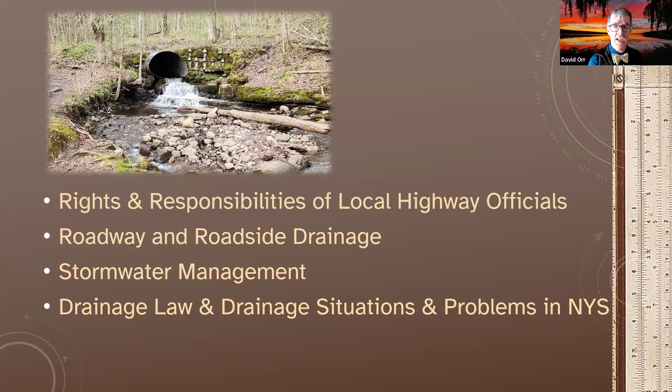There's rights and responsibilities of local highway officials, roadway and roadside drainage, and stormwater management. Those are all workshops. And then we also have a drainage law on drainage situations and problems in New York State, which was written by Darryl Harp, who used to be the chief counsel for New York State DOT. And a lot of what we're talking about today comes from that particular workbook that's up on our website.

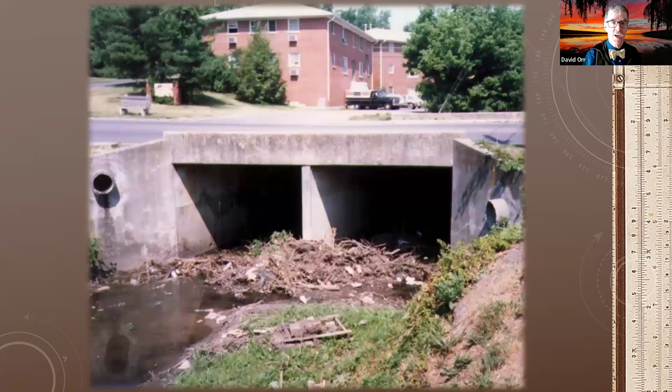You know, if you see an old bridge like this one, big double box culvert, which DEC would prefer you not to have. We'll talk about that a little bit. But when you get this debris, who's going to clean it up? What do you do about the debris coming down? Whose responsibility is that? These are all things that come into a legal aspect, and of course, liability, as y'all put onto the word cloud that we've got.

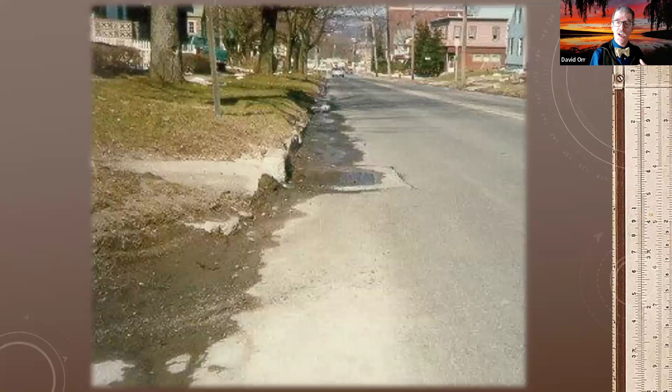In an urban area where you've got stormwaters and storm sewers, you've got to worry about your system and what happens when it first flushes. What happens during a storm event? What happens if it gets plugged up by somebody else's debris? In this case, it was from a construction site on the left, actually plugged up the catch basin somewhere, actually the pipe between 2 catch basins. So how do you clean that out properly? And you're going to have to deal with the storm sewer system, and that can be an issue to deal with.

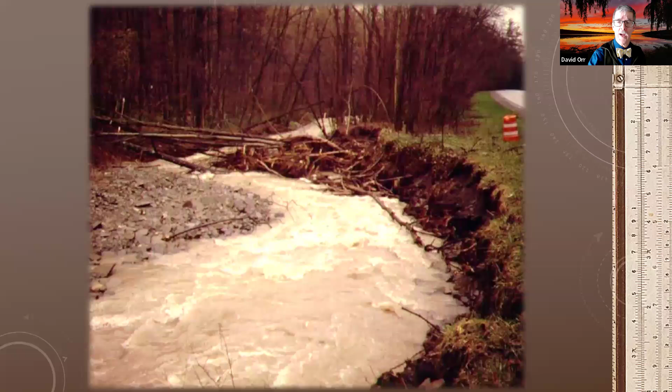Then we can get issues where we have a stream that gets out of its banks and it starts to threaten the roadway. And what can we do legally here, and what do we have to do in the way of both permitting and to make sure the problem doesn't come back? And I'll give you a hint, by the way. Don't just go in there and straighten the stream out. That would actually be one of the worst things you can do, would actually make the problem worse.

When we have a farm field or just any field or land where it intersects with the highway, how do we bring water from the private onto the public right-of-way? And if we can do that in a coordinated way, we're all going to be better off, but we know that doesn't always happen. If we create our own problems, we have to deal with our own consequences. If we don't take care of erosion, if we don't take care of where the water is flowing, we may be responsible. And these are all drainage law issues that we're going to have to deal with.

So that's our goal today. We're going to be talking about all of these things and hopefully give you some insight so you handle water in a better way. And I have good news for you, however, that it turns out that there's actually a pretty cool rule that we can use that saves us most of the time.

So now, first poll that's a question, not just a welcome, that is, New York State drainage law is derived from which of the following? Common law, civil law, reasonable use, or none of the above? Okay, not what it is today, but where does it come from? Okay, so in the United States, we have two choices for drainage law. Okay, you can keep answering while I go on,

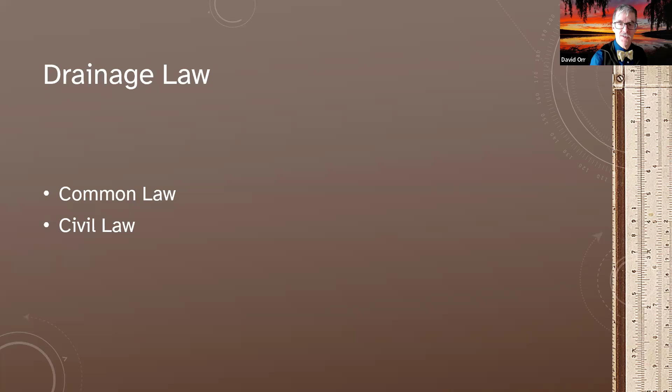So when the Grand Teton Dam failed in Idaho, which was a common law state, they could say, well, we just decided we didn't want that dam anymore, and we're just discharging it. Now, obviously, that's not reasonable. Nobody would expect that that's a reasonable activity, and the courts would have definitely ruled against that. New York State, by the way, is a common law state. Our laws came from the common law. Okay. Now, there is another law in the United States called civil law.

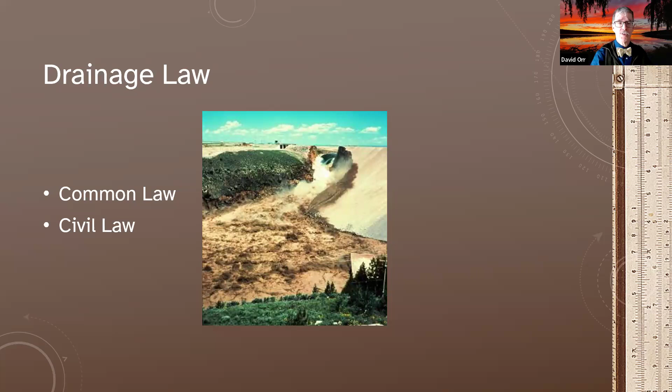That means you're supposed to be civil to your neighbors. You're never supposed to change anything because that's not being neighborly. And so therefore, theoretically, after Hurricane Katrina in Louisiana, which is a civil law state, Louisiana and Maine, the ones with French connections, they could have done nothing. And that's not reasonable either.

And in every single state, the law now has gone towards reasonable use. Between court cases and judge decisions and attorney generals and comptrollers, the idea is reasonable use. You can probably do it if you're reasonable about it. And that works 95% of the time. I'd love to say 100, but remember, there's conflicts and there's still court cases that are involved.

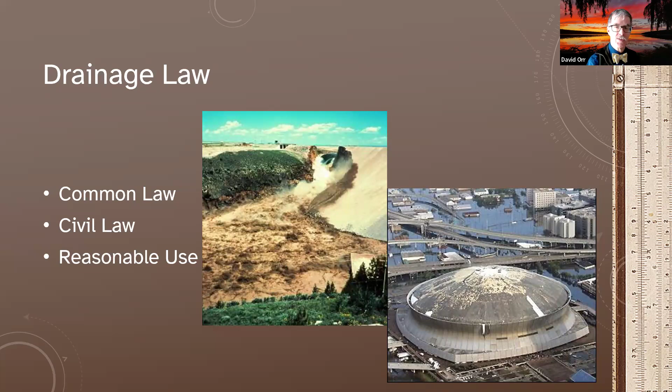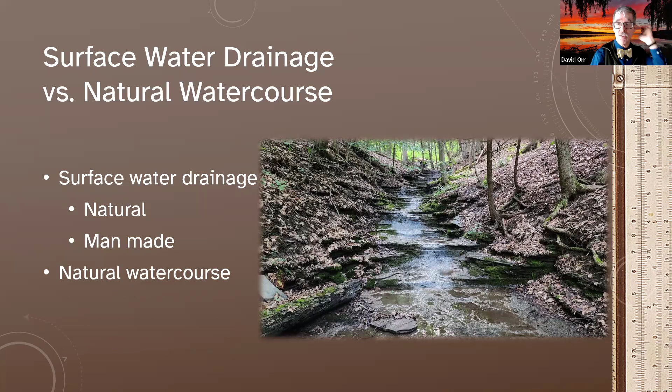If it's man-made, you have to control and take care of that water until it gets back to a natural water course and isn't creating any problems for that natural water course, okay? Now, what is man-made? Well, that's where the court cases come into play, and we'll talk a little bit about that, but just realize that if it's natural, you can probably do almost anything because it's considered part of nature, okay?

Now, if you're in an urban area, it's usually pretty easy. You've got storm sewers, you've got lots of impervious surface, you've concentrated and increased the peak flow. Almost assuredly, that's going to be considered man-made waters, whether it's from the surface or even in the natural water course. It's no longer a natural water course at that particular point. So in that case, any water in a storm sewer system, you have to essentially control it until it is dissipated back into a natural environment. That means you don't want to have erosion, you don't want to have extra pollutants. There's all kinds of things you have to worry about there.

So one of the questions that comes up then is putting a culvert in. Is that a natural water course or is that a man-made water course? So I'm going to ask you to raise your hands, okay? And I've got your question, Paul, I'll come back to it in a minute. But raise your hand if you think that stream is man-made flow. Let's see how many people raise their hand. Okay. A lot of you think that's man-made flow. Now, I'm assuming the rest of you think it's not man-made, but let's just confirm this.

Watch this trick. Hands are up. All the hands are going to get lowered magically. Watch this. Jody and Amanda in the background, magically lower your hands.

Now, everybody who thinks that's a natural water flow, raise your hand. A lot more of you. Yeah, and actually, a lot of you didn't vote. And guess what? Every one of you has some good arguments to be made, and we'll talk about that. But most of the time, if a culvert's been there for a long period of time, it's considered a natural water course. If you don't have records of when it was installed, and it's been there as long as anybody can remember, the courts have generally said, yep, that's a natural water course.

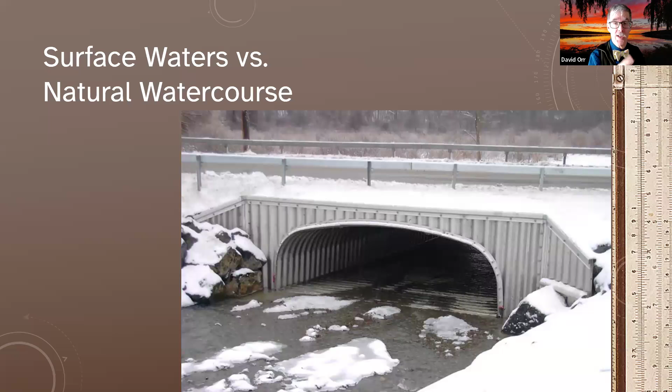I want to leave that question active. It's a good one, and we will come to it, I promise. But let's talk first about replacing the culvert, okay? So we got a culvert washed out during a big rain event, hurricane actually. I can't remember if it's Irene or Lee.

Pipe is actually big enough to handle the design storm. Could the municipality reset that pipe without a permit? True or false? Can you answer the question? Could the municipality reset the pipe without a permit? True or false? By the way, I'm only giving you two choices. I should give you a third.

So about 3/4 of you are saying true, about 1/4 of you are saying false. What I should have given you is a third choice, of course, which is depends. Okay. Depending on the stream, you probably can replace it, but certain streams you'll probably have to get a permit.

If you declare it to be an emergency situation, and yeah, I think that's an emergency situation, you could still replace it without the permit, but you still need to think about the same requirements as if you were getting a permit, okay? So in terms of bank full, in terms of discharge, in terms of things that you're going to be doing, okay?

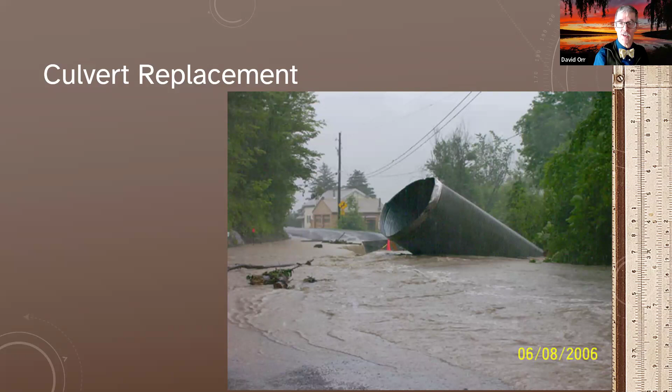So yes, most of the time you probably could, but again, are you being reasonable about the replacement? Are you making sure you're not creating an erosion problem downstream? Are you dealing with any changes in flow that have occurred since the pipe was put in the first place? So these are things that you need to be asking yourself.

Now, I don't know if you've seen this yet or not. It is available on the DEC website. You may want to review this. It is not yet an official set of guidance, but I will tell you, this is out there. Public comment period is already over. We'll see what actually gets promulgated. But they have some draft guidance for the review of bridge and culvert projects where there's a DEC permit needed.

And first off, they're preferring bridges and open bottom box structures, a natural bottom, either an arch or a bridge. Four-sided boxes are okay, but they'd like to have it embedded, where you've got fill above the top of the bottom, unlike we saw in that aluminum box. Elliptical or squashed, and then round is actually the least preferred of all of those.

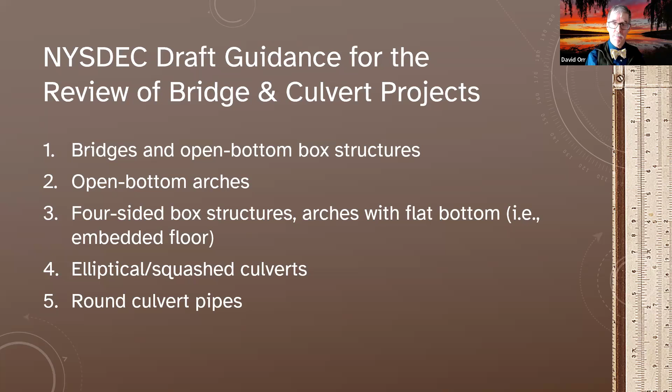And the reason for that is that they want to make sure there's connectivity. Aquatic animals can get through, lizards can get through, even just mammals can get through, and it's harder and harder for them to do that the more man-made the bottom is, the more like a round pipe. The other one that is going to come up, and a lot of you may have heard about, comes back to the size of the pipe.

So do you know the design storm you use for your crossroad culverts? Can you tell me that? Okay. So let's see what y'all have for your design storm.

And somebody asked a good question about increasing the size of a culvert during an emergency. Absolutely. You probably should be thinking about making it larger to handle the design storm that it needs to handle. If it can already handle your design storm, then you can put it back. But otherwise, yeah, you might need to make it larger. That's a very good question.

And I see somebody put in two different answers. And the reality is you might have different standards for your crossroad culverts. Maybe some roads are more critical than others. Okay. And the reason I put this out there is part of this draft guidance has some rules about pipe sizes and bridge sizes. Okay.

That's important to know. Now, you probably have seen the fact that we already have a requirement in place on certain streams that any culvert that's put in is 1¼ times bank full width. And there's definitions about bank full width, but essentially think about something with a floodplain. The pipe needs to be 1/4 larger than that to try to keep it as natural as possible.

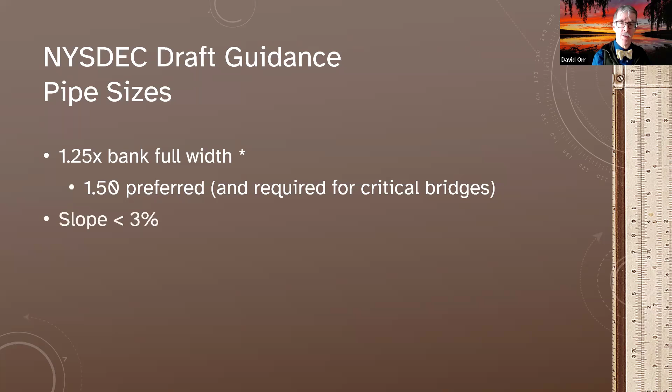The new standard, 1.5, is preferred and it may be required for certain critical bridges. I've read through it. I'm not quite convinced I've got my brain wrapped around what critical bridges are, but it's something to think about. Slopes should all be under 3%, especially if there's a bottom in it. The key there is aquatic organism passage, or AOP, connectivity and continuity, okay? Now, in terms of sizes, bridges, i.e.

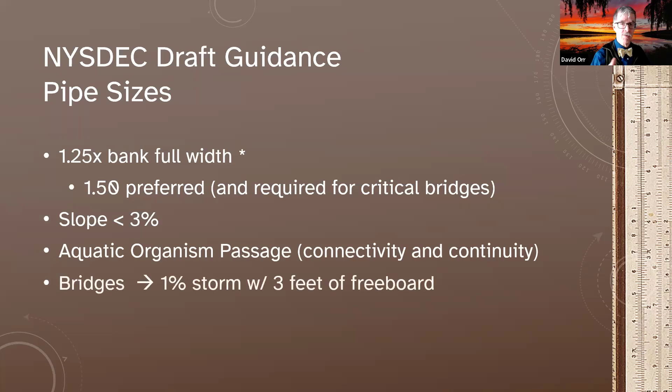20 foot or above, 1% or 100-year storm with 3 feet of freeboard, which can be, I think, a challenge for a lot of us. Okay. For culverts, they're actually looking for a 2% storm or a 50-year storm, if you're more familiar with that, with a modification of at least 110 or maybe even 120% of the flow. And they want 2 feet of freeboard during that design storm.

So the days of designing it for freeboard with a 10-year storm and checking it for a 50-year storm, or 10% to 2% storm, are changing; they would like to see a 2-foot freeboard in every single case. It's not just scour critical, as the person put in the Q&A. There's a little bit more than that; certain stream types also come into play, like trout streams and Class A streams and things like that. But yeah, scour critical is listed as well.

But there are some things you're going to be thinking about, and you're probably going, wow, this seems like a lot, and it could be, and we may be turning a lot of culverts into bridges. But there are some special considerations you may want to look at and review. For instance, if you're on a very low volume road, you may be able to use the standards that we developed, apply them, and keep pipes the same sizes that are in there; slightly smaller 25-year events, 4% storms, would be allowed in a lot of cases, or for driveways.

Okay. Again, exactly what's going to get promulgated, I'm not finally sure, but it is something you want to keep in the back of your head. And we'll probably wind up doing some additional stuff the next time we run this webinar or similar webinars.

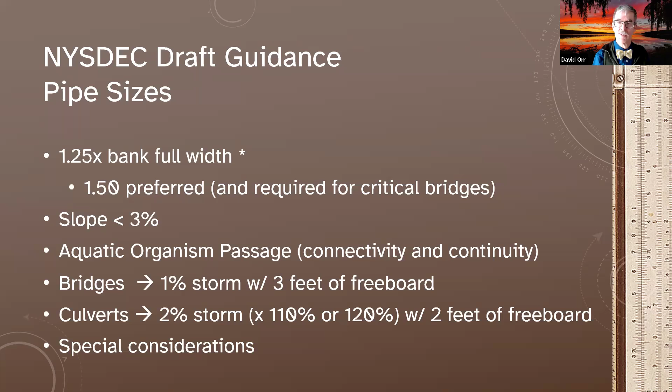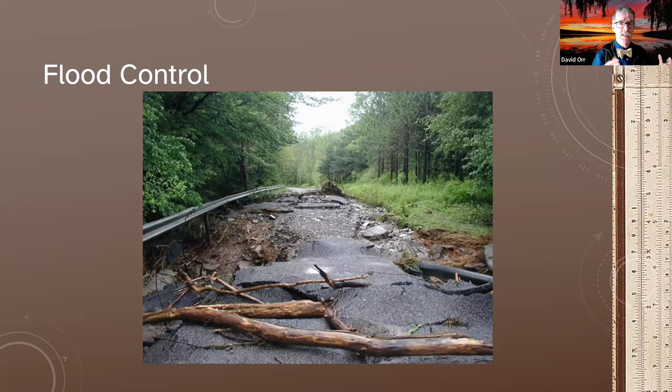Now, in terms of why all this matters from a drainage law standpoint, well, what we're trying to do is not have floods like this. What we're trying to do is have water be as natural as possible, but we also know no matter what, we're going to have events. We're going to have flooding events. We know there's evidence there's going to be more flooding events, so it's just something you need to keep in mind in terms of where you're going to do things.

If there's a swale running across a field, must it be left open? True or false? What do you think? And this starts to get us to the question that Paul asked, which is a really important question about diverting streams. Well, we got a 50-50 split. Wow. I'm a little surprised by that, to be honest with you. Now, you can't just fill that in. I can tell you that right now.

One of the most critical things, an easy rule to remember, is you cannot move water from one watershed to another. Okay? Now, could you put it in a pipe? You might be able to put it into a pipe, but remember, you may be getting on towards that line where you're now turning it into concentrated flow, man-made water. You're now responsible for anything that water might do in terms of damage until it's back to a natural condition. But you can't just fill it in.

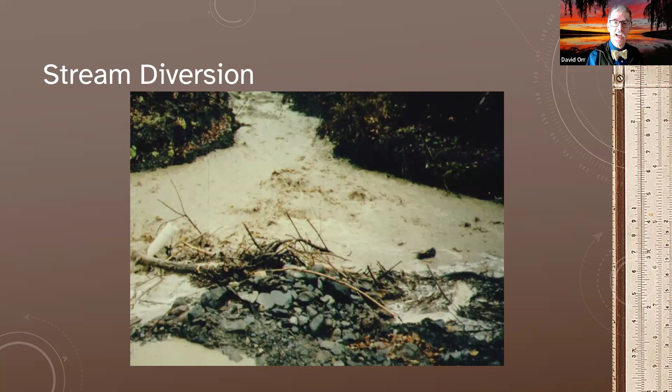Okay. In this particular case, the town had a hard time going after them. They don't have full-time attorneys. But guess who does? Yes, the DEC. They contacted the DEC. The DEC went after these people who had changed the watersheds, and they got the property put back to where it had to be. Okay, so the DEC can actually be your ally, and that's one place you can go to go after them.

If you get a private property owner who fills in a ditch, who doesn't let the water flow. Okay, and there's some other things that a highway department might be able to do, and we'll talk about those here in the rest of our time together.

What it comes down to is you can't move water from one watershed to another. Anytime you are collecting water, changing watersheds, it becomes man-made water, and now you are responsible for that water until it's back to a natural condition. Okay? So neighbors who change grades and put in new discharge drainage, they've created the water, they're now liable for that situation, and they picked up the liability. If a municipality does it, the municipality picks up that liability.

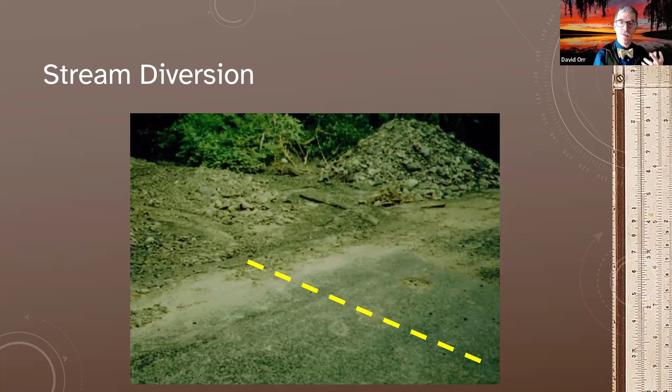So again, remember the term reasonable use. Even if you want to do that, there's a need to do that. You may be able to, barring any permits, but you have to be reasonable about it. You can't just concentrate all the water and discharge it into a lake and go, we're done. Because you may have extra pollutants, you may have extra sediments, you may have a whole bunch of different things. And that's what we'll talk about in a few minutes. MS4s come into play, okay?

Reasonable use works 90–95% of the time. So neighbors can't change grades and just do what they want with the water. And they can't ask you to just plug up a culvert pipe. That's no. There's a pipe that's been there for 20 years. Remember, the courts think that's natural. You can't move water from one culvert to another just because they don't like the water going there. It has to be done in a reasonable way, and it has to be done in a way that is controlled. And you may need to bring in engineering. You may need to do something beyond.

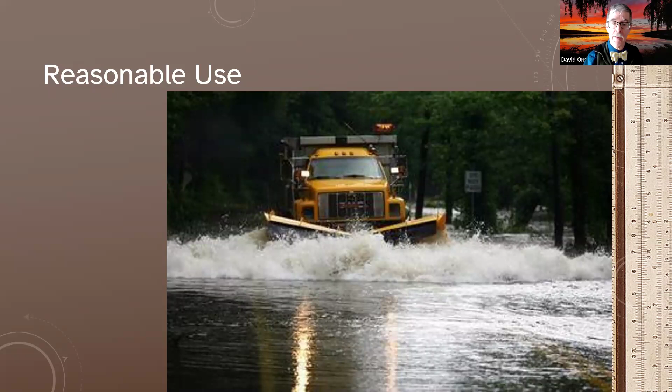Now, recently they have replaced it. They got themselves a BRIDGE NY grant, replaced a couple of pipes in the area, much bigger pipe now. Okay, it's much larger to handle bigger storms. And we could talk about the advantages and disadvantages of a project like this, but now it's going to be able to handle the bigger storms.

But now what happens downstream? Are you doing it in a reasonable way? It might be considered natural flow still, but if you create a gully downstream, that's not kosher. That's not reasonable, even in a natural stream environment. So you have to make sure you dissipate that energy and you don't create problems. Much in the same way you can't pond water up onto somebody else's property either. Okay, so keep these things in mind.

Now, there are equivalent laws for county, village, cities, depending on their charter, when it comes to riparian rights, but I'm just going to go through the town highway law portion because they spell it out pretty well. There are equivalents, slightly different. You're going to want to look at the highway law specifically if you're on a county road or you're on a village street, but good rules to think about using the stuff from the town superintendent side of the house.

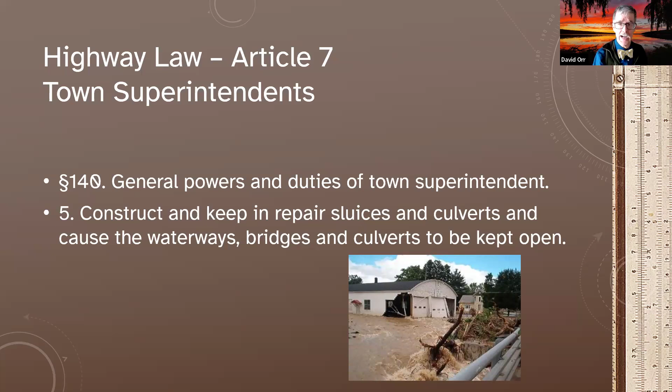Now, there are other parts of the law that are useful, and you could read the highway law and spend a whole time doing it, helps you with insomnia. But there's other sections that you might want to think about. So for instance, anytime you want to cross under a roadway, especially if it's a private entity that wants to do it, they can do so.

And the highway superintendent has the power to essentially allow or not allow drainage, sewer, water pipes, cattle passes, and crossings under the highway. So for instance, if you're ever driving on 206 near Greene, there's actually a cattle crossing underneath the highway. That would be approved by the highway official to allow that. Should be done in a controlled way so that liability doesn't accrue to the town or the county or the village or even the state, but stays with the person who wanted to put that particular thing in. Should be permitted, should be monitored, should be put in properly.

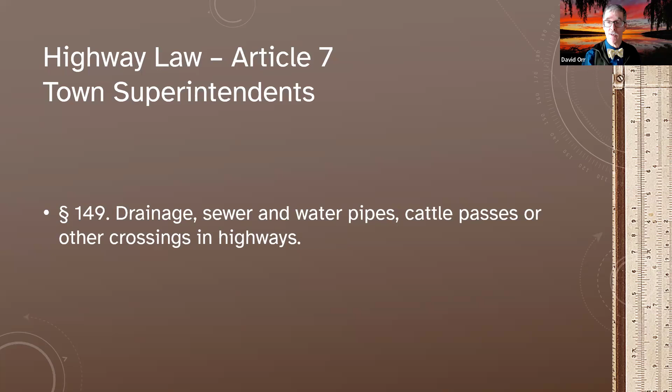Now, when we start getting into stormwater sewers, now we're starting to talk about the overall town highways, the board needs to be involved. And a good rule of thumb is anytime you're doing something where you're starting to concentrate flow, get the board involved, get the municipal attorney involved. Really, really important, okay? To make sure everybody is on board and is on the same page, okay?

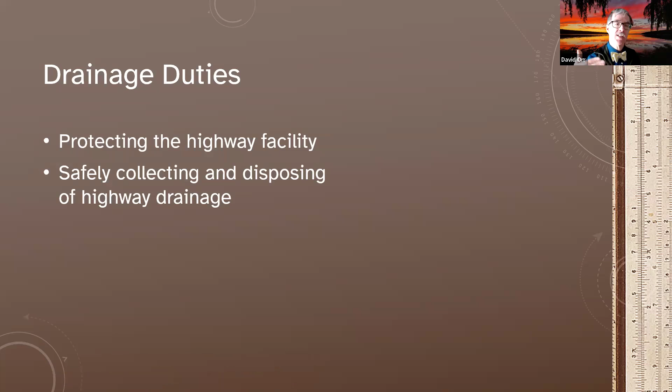Now, what are the drainage duties? You can slice them all you want in every section. It comes down to 4 things in New York State. Number 1 drainage duty is to protect the highway facility, okay, from damage due to drainage. You then need to safely collect and dispose of said highway drainage. Safely pass the water, and I love this part. If you read the laws, it talks about passing the water across the highways. Well, it probably should have said under, but that's what it says, across the highways. And then protecting private property from damage due to collected water being cast onto private property by the highway department.

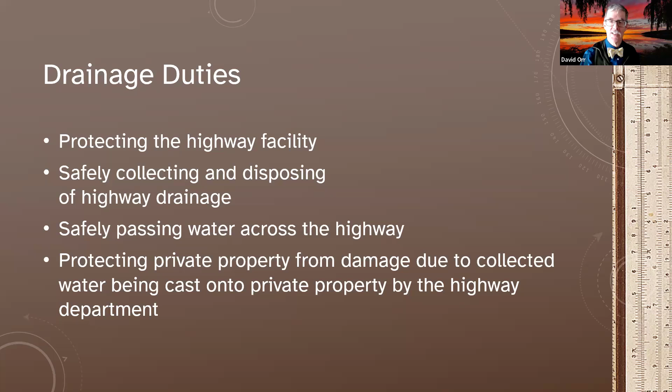Now, I want you to understand, this is where we create a lot of confusion. People say, oh, well, that means water off the road. The highway department has to take care of it. No, it does not say that. Essentially, what it says is damage due to collected water. That's that man-made water situation. The road in and of itself being there and the water running off doesn't fall into that category, at least according to most of the court cases, okay?

So it's collected water. If it concentrated flow and discharged it, if it created an erosion gully, yes. But if it's just dissipating in what is considered a mostly natural condition, just a roadway, no. And the highway department does not have the power or the duty to go do repairs due to drainage that's not caused by this collected water situation. They can't go and do work for just a private entity. It has to have a public highway related purpose.

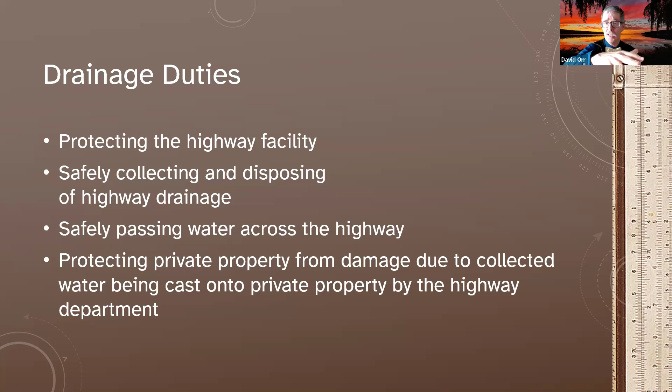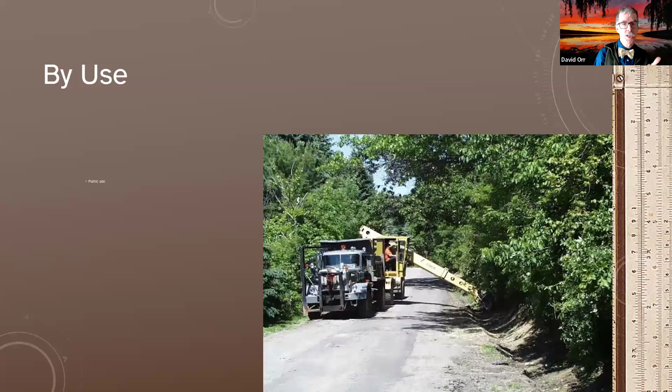Now, in terms of deeds, again, you're going to go down to the clerk's office. You have a piece of paper that defines the right of way. It makes it pretty easy. But by use, there has to be public use, not a driveway, not two houses. There has to be a public use. Where does that line fit? Again, court cases have ruled different things, but if there's a business, a church, a school, it's a through road, public use. A single house, couple of houses, probably not.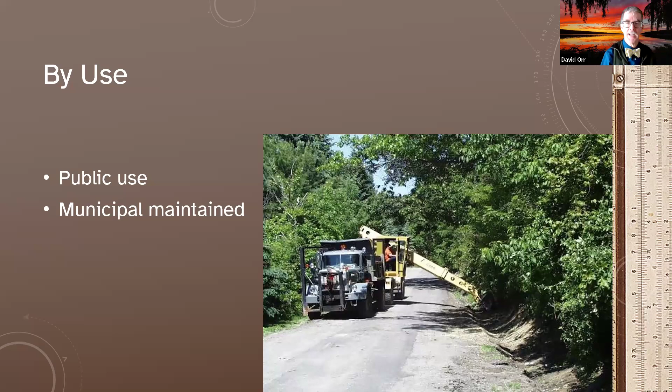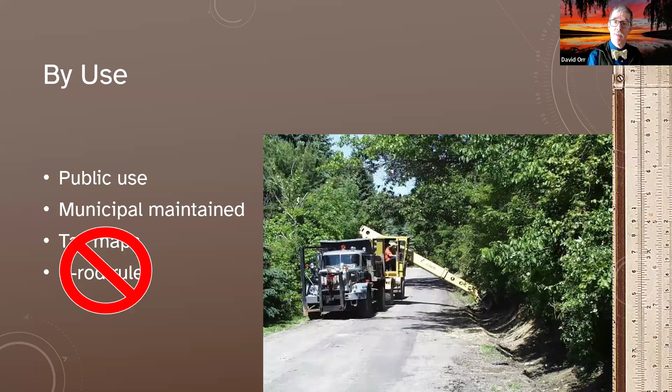Now, some people like to go look at the tax maps, or they use the 3-rod rule that's written into the law. Please don't do that, okay? Because it can get you into trouble. Because what is the width of a road by use? Again, you can click on here. What's the width on a road by use? Utility pole to utility pole, ditch line to ditch line, 50 feet, 3 rods, none of the above.

It's not 50 feet. 3 rods would only be 49.5 feet, but it's not 3 rods either. The courts have pretty clearly said it's what's been used and maintained. Oh, by the way, it might be more than 3 rods in roads by use, which can actually be a benefit in some cases and liability as well. The utilities may or may not be inside the right-of-way. On a deeded right-of-way, they have a right to be there. Outside of one, it can get complicated.

Certainly the ditch line we know is included, but if you let a tree grow up, that means you haven't maintained it, and you can lose that right-of-way in only 6 years versus 10 years to gain it. So yeah, none of the above is probably the closest answer. There's no fixed single answer. The case law is something like 20 pages in the McKinney's case law book, which you may want to look at if you combine the streets from the villages and the town highway law 189. So there's a lot of cases involved here.

Now, in terms of the authority to control, I want to make sure we understand that a town or county board does have the power to control things outside the right-of-way and even within. So they can require people have a certain setback for fences and setback for sight distance in an intersection, and stuff involving drainage has to be applied to everybody, and anything that's already in place, you're going to have to grandfather them in and either pay for it or slowly change things over time. Okay, but it is allowed. It's called the authority to control, but that's a board action that has to be taken. Okay, through local laws or ordinances.

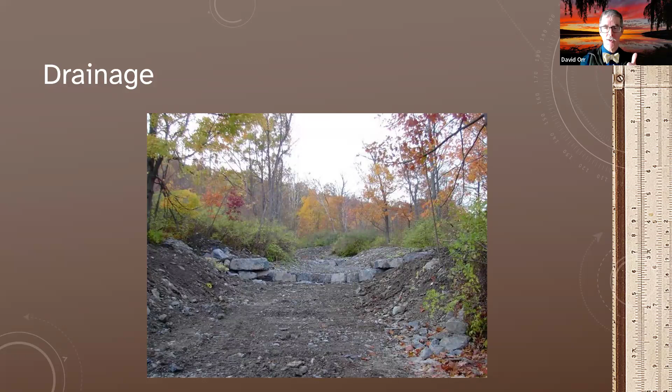Now, this is not a drainage law thing, but remember, we always actually talk about the importance of communications, safety, and drainage as well. And so I have to do my safety pitch. Trees, you lose the right of way, as I mentioned. Do me a favor, when you cut the tree down, please cut it flush. This is just a liability and a half. Please try to not leave things, a fixed object, anywhere near the roadway, in or outside the right of way. There's nothing about that that's good.

Now, how do we get permission to do all this work? You know, you're thinking, well, okay, we got a little sense of where the water's going, who's got the rights and responsibilities. Well, let's talk about 4 things that are really important for getting permission. Now, this is one, again, not drainage law, but we shouldn't forget about it. I know all of us probably know about 811, but you got to call before you dig, okay? Call 811, give them a couple of days, get your marks out there, go out and look at the marks.

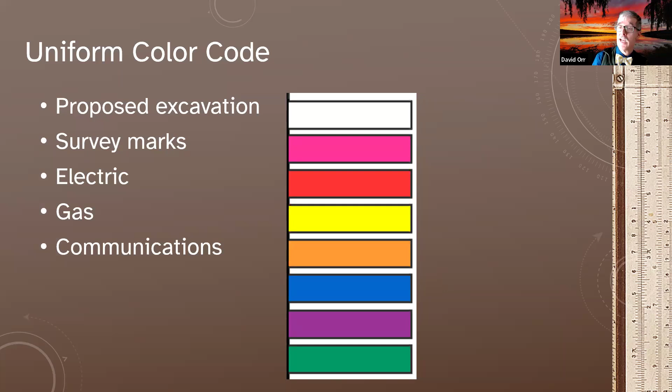If you put out white marks for where you want to dig, maybe a survey mark with your pink paint, and then you've got these other colors, and they tell you something. So it's one of the reasons why we really should be careful about what paint we use, because if I see a red mark, I'm thinking I got electricity. Gas is yellow, don't like hitting gas. Communications lines, fiber optic cables, water lines, reclaimed water like an irrigation system, and sewer. I don't like hitting sewer either.

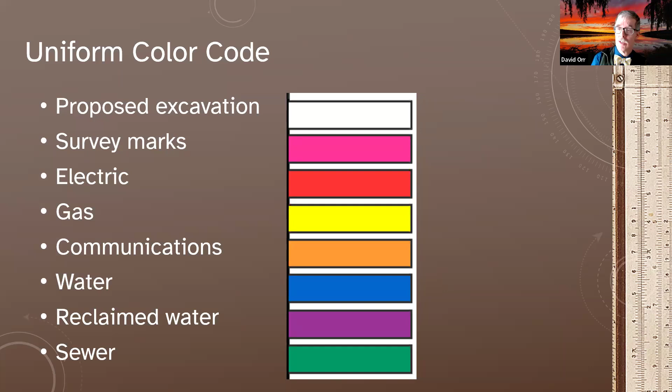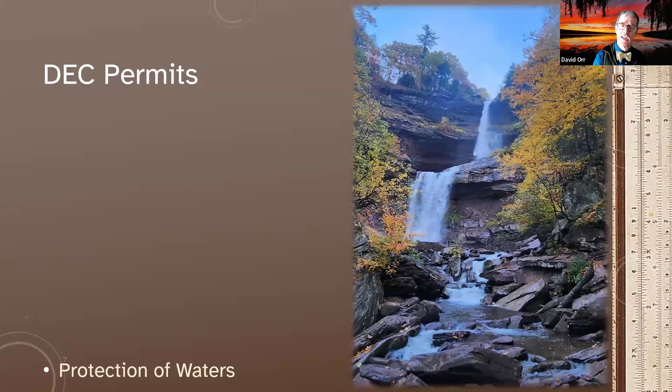Now, in terms of drainage, you're almost assuredly going to need a permit. Now, I say New York State DEC permit, really it's permits for anything you're doing drainage related, okay? Now, of course, we have the New York State DEC regions, but DEC permits can include all kinds of things. There's protection of waters, coastal erosion, stream protection, water quality certificates, freshwater wetlands, tidal wetlands, wild, scenic and recreational rivers, and a little bit we'll talk about SPDES permits. This is just a quick list. I went through the list of all the DEC permits, and I picked out the ones that were water related. There are plenty of others out there that I couldn't even possibly list.

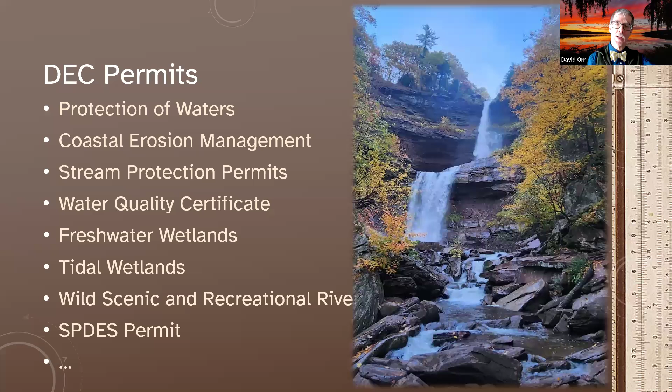Now, they've changed things. You know, at one time we had a single form, you filled it in and it went all the way around to everybody. Now you do something called a joint application form. And you actually check off which agencies you're going to send it to. The 4 that are included in the form are the New York State DEC, Department of Environmental Conservation, the U.S. Army Corps of Engineers, the New York State Office of General Services, and the Department of State.

What is no longer included, by the way, is Adirondack Park, Catskill Park, those kind of things. You may have to send separate things out. There may be local organizations you have to deal with. So communicate, talk. That's going to be your best bet to making sure you're in good shape.

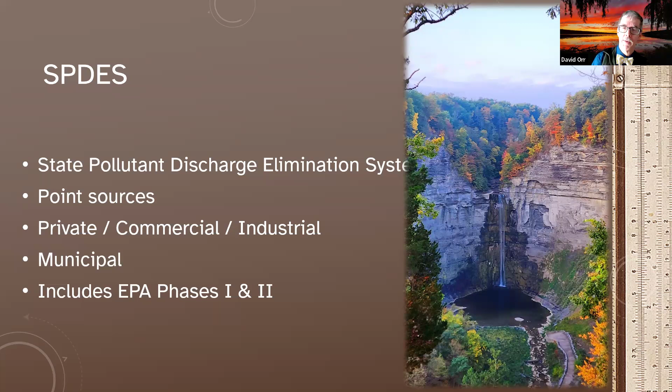Now, I just want to briefly remind you of SPDES, the State Pollutant Discharge Elimination System. Essentially, this is for point sources, not highway sources, for point sources. Now, if you concentrate flow, you may need to do a SPDES permit, but it's for point sources, traditionally private, commercial, and industrial, though again, a municipality who has a point discharge might need to do this. This is where EPA phases 1 and 2 come into play, where we're concentrating water, and we'll talk about phase 2 here in just a minute.

If you have a beaver, okay, you got beavers, you can't just go take the beavers out. You're going to have to get a permit to do that in a lot of cases, and you may need to think about some kind of beaver leveling device. Okay, if you're interested, we actually have one from the Town of Niles. It's actually one of our Better Mousetrap winners that you might want to look at. It's pretty cool.

And then, of course, I want to end up our discussion before we do our quiz for MS4s. That stands for Municipal Separate Storm Sewer Systems. And the idea is we're concentrating flow. We almost need to treat that as if it's a point source, and you need to manage it. And there's a process involved. Okay. Now, there are programs for urbanized areas for small MS4s. And the DEC does have the power to designate certain areas as part of a small MS4.

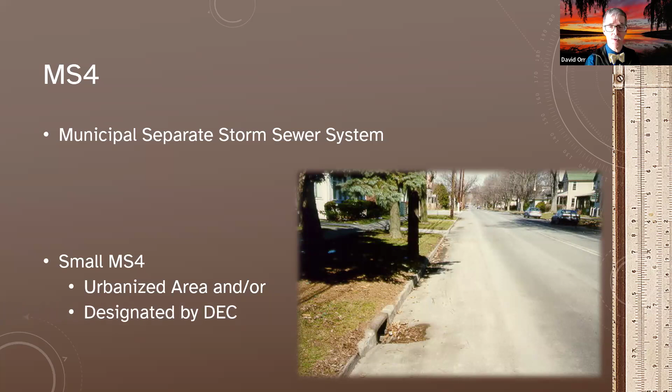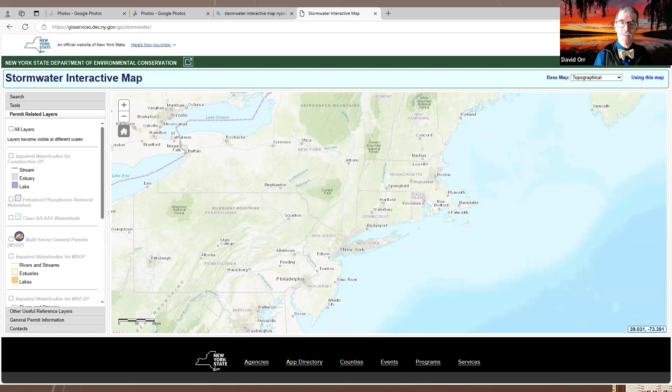So let's see if I get my pen working here. I don't like the color, though. Let me get a different color. Let's see, that color should work.

Now, if you want more information about MS4s and pollutants and stormwater, what I'd say is come to one of our workshops. We actually are offering our stormwater class this spring, talking about some of the changes, and there are changes. There's always going to be changes. Keep looking for that. And you can see we've got stormwater management in large parts of the state.

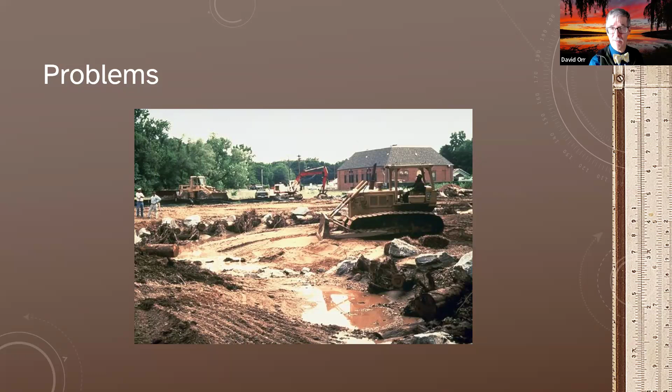In terms of easements, you're going to need to have an easement. Anything that you're going to be back to do repairs on, you need a permanent easement and you need to go through your municipal attorney. So get ready to raise your hands. How many of you know your municipal attorney, town, county, whatever level? Raise your hand if you know your municipal attorney. I hope at least half of you do. And not quite half of you. You should know that municipal attorney.

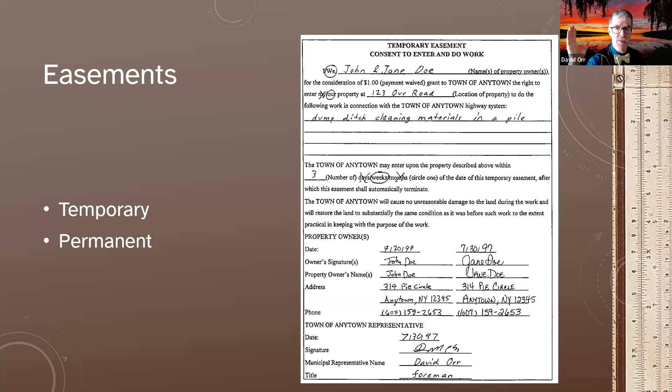Now, there are attorneys with the NYCOM, there are attorneys with the Association of Towns, NYSAC, and all that, but you really want to know your municipal attorney. You should know them very well. And remember, if it's something you're going to be back for, that's a permanent easement, not temporary. Temporary is things like storing equipment or dumping some ditch cleanings properly.

So let's do a little quiz, get you out of here. Ready for the quiz? Some of these are repeats, so we'll see how y'all did. What is your biggest drainage law concern? Y'all talked about liability, discharge, responsibility. I hope we've covered most of the things you've got there. If we haven't, please throw them into the Q&A. So let's just see how you did.

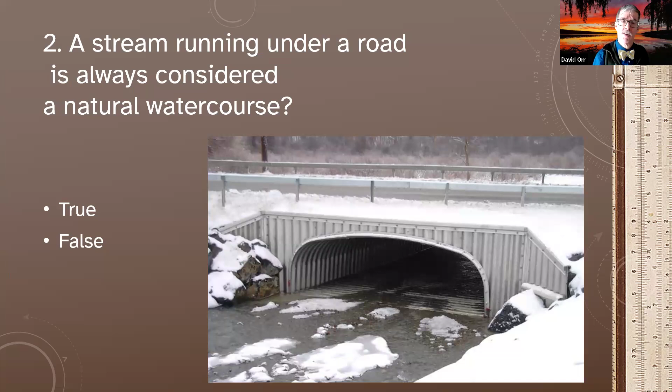A stream underneath a road is always considered a natural water course. True or false? Well, y'all voted before mostly for true, but if I give you a new choice, I add in a third choice. What do you think? And this is fun because I'll let you put your answers in before I show the results. And some people are putting them over into the chat. I'll give you 10 seconds. We've got time.

Let's see what y'all came up with. Most of you said depends. Yeah. If I only give you 2 choices, most of the time it's probably going to be true. But there's always those edge cases. If you're not sure, just ask yourself, is this reasonable? If you're resetting an existing pipe and there's no evidence of a problem, you don't have a backflow problem, you're probably okay. And by the way, the courts typically will say it's natural first. They'll start from that standpoint. One way to help you overcome this is go down to your local soil and water conservation district office. They do aerial photographs every 10 years.

Yes, they're electronic these days, but you can go see how the drainage patterns have changed between that and the USGS maps and get a sense of how long it's been there. And if it's been there for 20 years, yeah, it's probably going to be considered natural. So I'm hoping most of you know your soil and water conservation district. If not, get to know them. Definitely a resource you want to add to your pile.

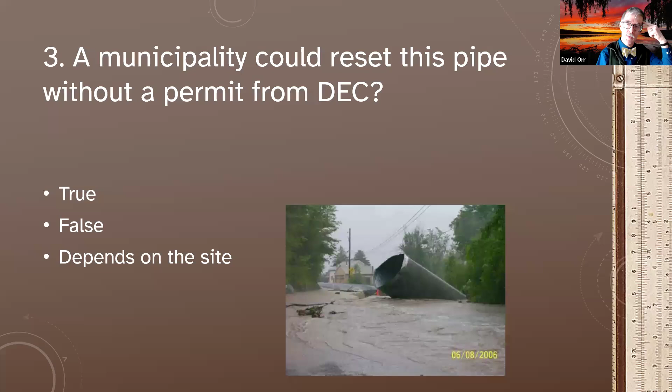So could a municipality reset this pipe without a permit from the DEC? Would that be a true, false, or depends? Ask yourself the question, and I'll show you what you had for the answer in just a second. Okay, and yeah, it's going to depend. And again, if it's an emergency situation, you probably can reset it, but think about what would the requirements be if you were not in an emergency and try to do those as best as you can.

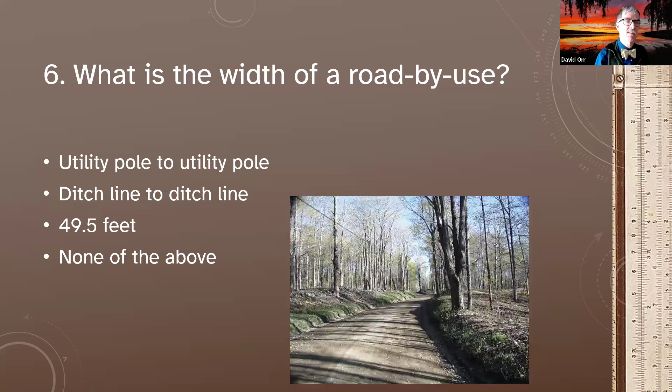What's the width of a road by use? Well, it's not utility pole to utility pole. It's not ditch line to ditch line. And it's not 49.5 feet. It's really none of the above. And this is what y'all did last time. And yeah, none of the above. It depends upon the situation. The utility pole and ditch rules are pretty good starting points. But if you get a tree growing up, if it wasn't maintained, that can change things. I'll tell you right now, the best thing to do if you've got a road by use is try to work with people. And yes, I know some people will not work with you, but we got to do what we can do in a reasonable way.

Now, this is the end of our webinar on drainage law. I hope I answered your questions.